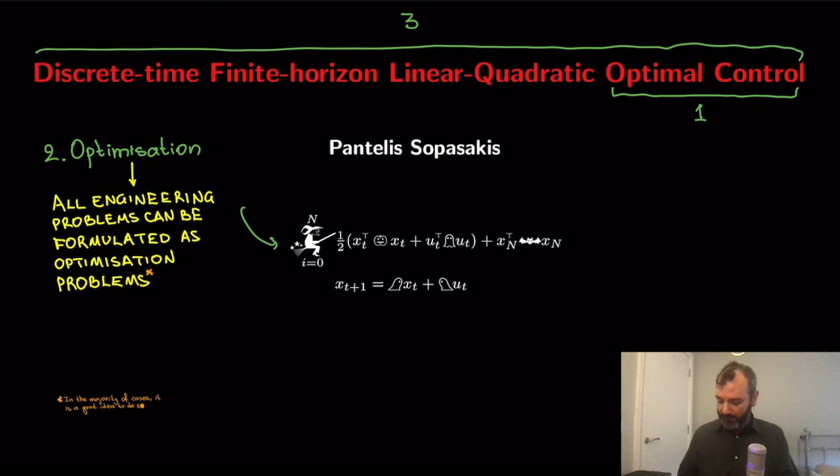I'll give a few examples related to control in the following slides. So this is how this will work today. First, I will define what optimal control is, but I will not tell you how to solve it. I will just try to motivate why we are interested in solving such problems. Then the focus will be on optimization, and then we'll come back to optimal control, and we will solve perhaps the simplest optimal control problem, which is the discrete time, finite horizon, linear-quadratic optimal control problem. Again, it's a lengthy title, but there is no short version. We will be focusing today on convex optimization.

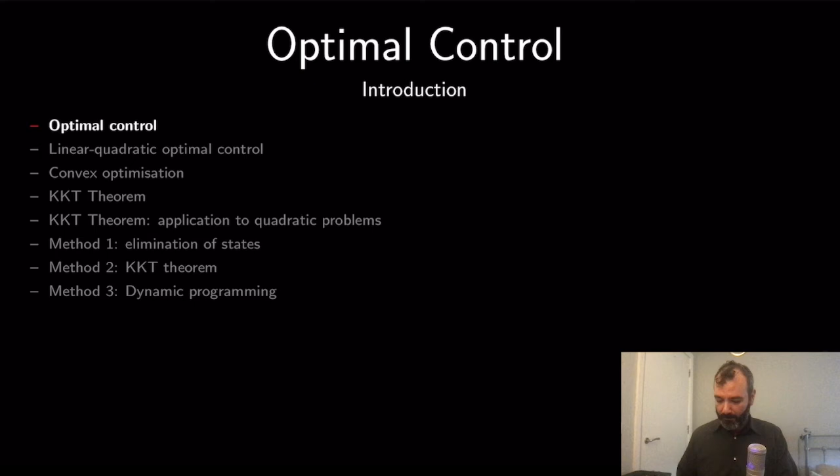Let's start with optimal control. So what is optimal control, more or less? How can we describe it? It is controlling a system, trying to steer a dynamical system to a certain target, a certain destination or set point, while we minimize a certain performance index. So we have a way to measure and characterize the performance of trajectories of the system, and we want to optimize it, to minimize it, for example.

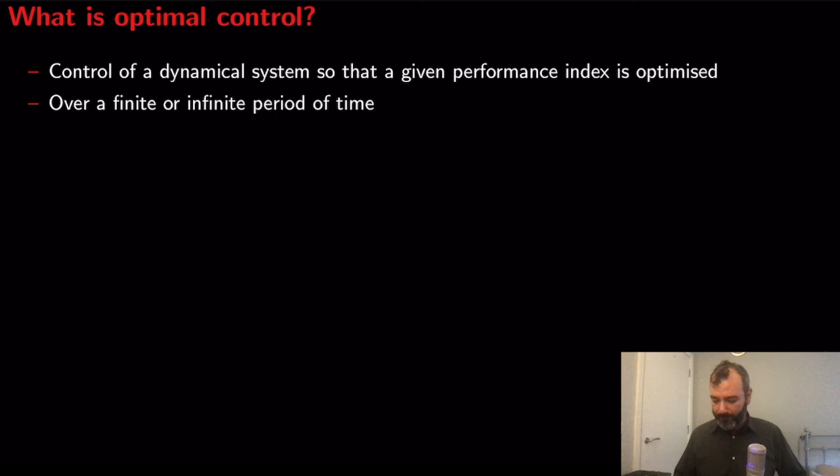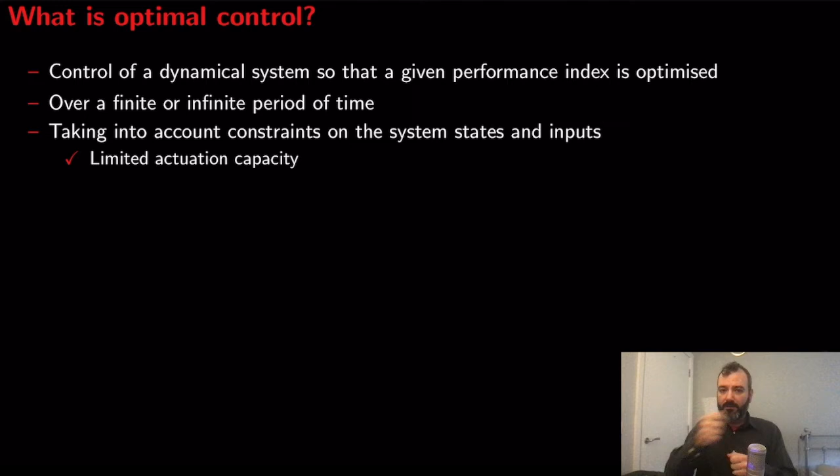And we will do so over a finite or infinite period of time, taking into account any constraints that might be acting on the system states and inputs. For example, you might have limited actuation capacity. When you drive a car, it doesn't make sense to steer the steering wheel too much—there are certain limits. If you have a pipe with water running through it, you can turn the valve to the closed position, a 0% flow, or all the way to 100%. So your actuator, the valve, can only take values between 0 and 100%.

You cannot use the valve to make the water flow at 120% of the maximum, or go negative. Or, for example, if you have a switch, it has only two possible values—it can be on or off. If on is 1 and off is 0, these are the only values that the actuator, your control action, is allowed to have. So these are examples of constraints.

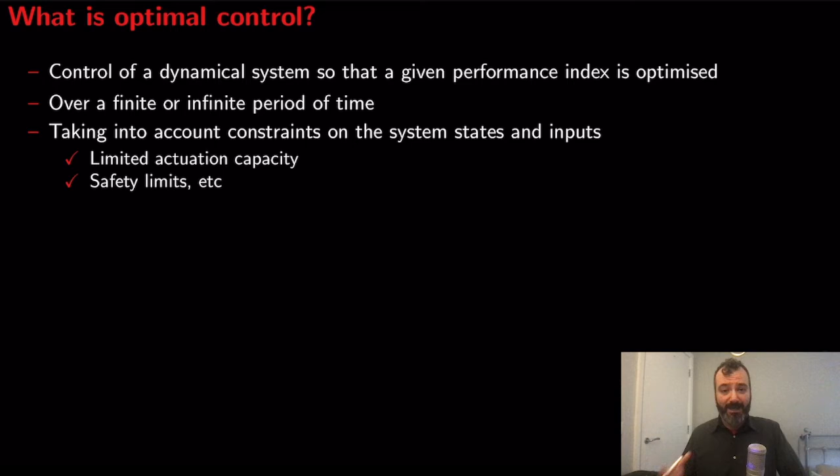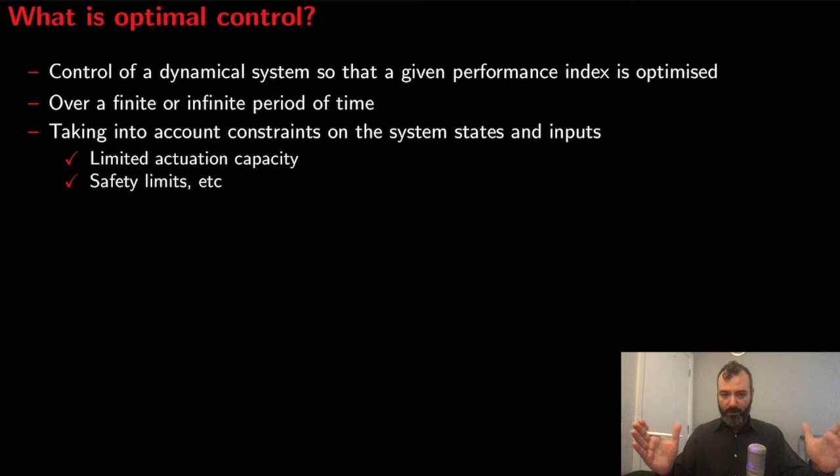You can have safety limits. If we are talking about autonomous vehicles, a safety limit is that the car drives only between the boundaries of your lane. Or if we're talking about a chemical reactor, a safety limit can be that there is a minimum and a maximum temperature.

Other considerations are the economic operation of whatever we are controlling. Back to the vehicle example, economic operation corresponds to minimization of fuel consumption, or if you're operating an electric device, minimization of power consumption, or at the same time, maximization of productivity. These objectives can be conflicting—you cannot have minimum fuel consumption and maximum productivity at the same time. You need to strike a desirable balance between these two.

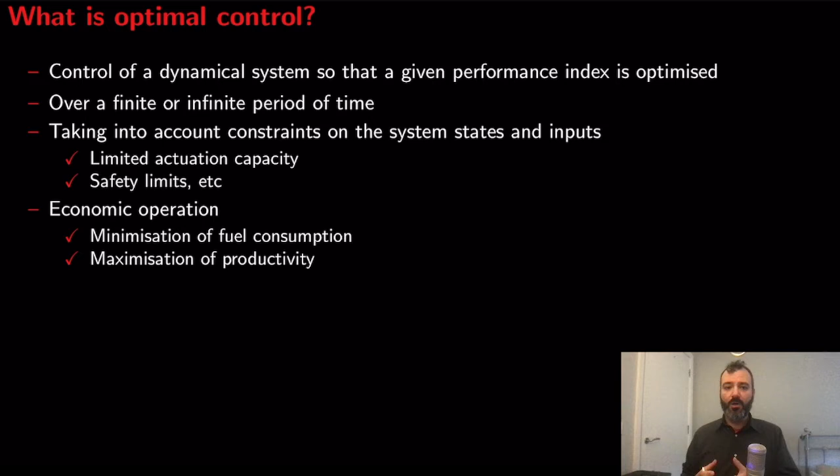So these are examples of objectives we can have in optimal control. To put it concisely, you have a dynamical system—think of a vehicle that needs to drive from an initial position to a final destination. The question is, how can you do that in finite time so that you minimize a certain performance index, while taking into account any limitations on actuation, on control actions, or safety limitations on the state variables of your system.

There are many applications of optimal control. One of the first applications was chess and checkers, studied by Richard Bellman in 1965. Also, how to reach the moon with minimum fuel consumption—these problems were studied in the 60s and 70s. And then we have inventory control, autonomous trains, car parking, and robots, which are operated primarily with optimal control.

Then you have even systems that you wouldn't really think of as engineering systems, like in macroeconomics, how to maximize the GDP of a country, or how to minimize unemployment, or do both at the same time.

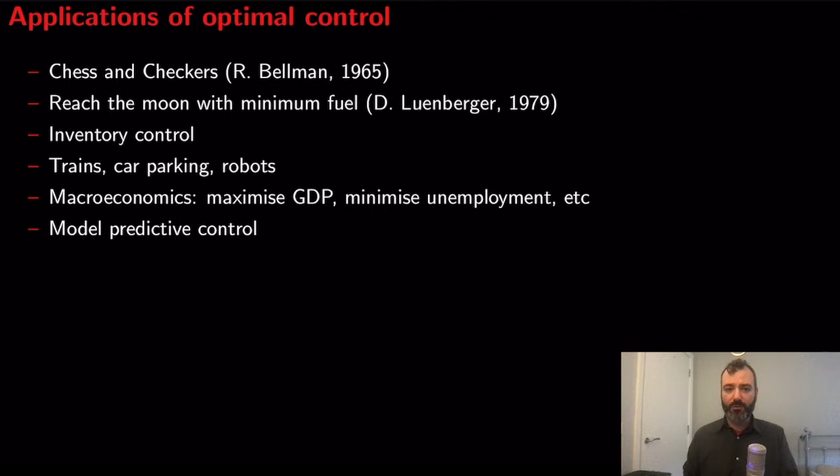And then we have model predictive control, which is the main objective of this module. So actually we are studying optimal control because later we will use it to design appropriate model predictive controllers.

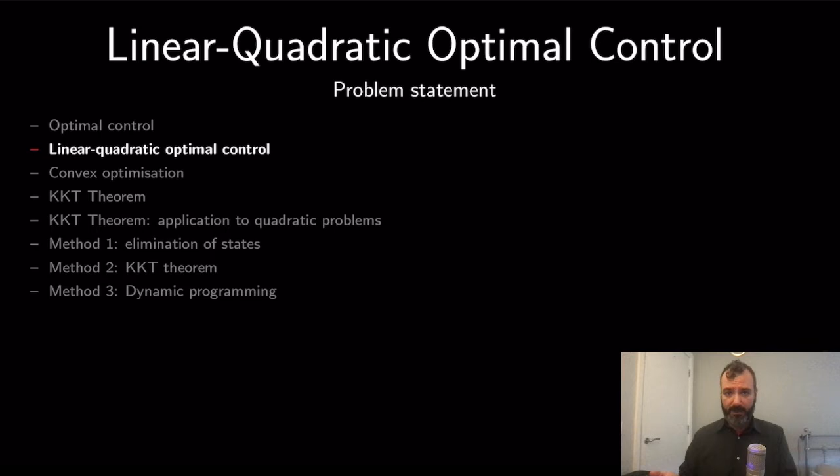Now let's try to be a little more technical when it comes to this form of optimal control. This is one of the simplest possible formulations of optimal control problems, the linear-quadratic optimal control, and it is in fact one of the very few cases that we can solve on paper. In principle, we cannot solve optimal control problems analytically on paper, we have to use software. This one is an exception, a case that we can actually solve ourselves without computers.

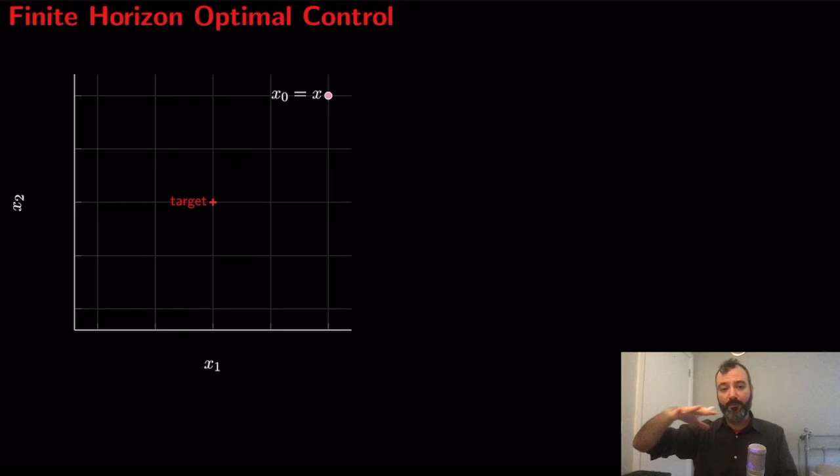So imagine you exercise a control action, and the system from here goes here. And then another control action, and from here the system goes here. You will see that x1 is a function f0 of x0, u0. This is the system dynamics, some equation that comes from physics, like Newton's laws of motion, that dictate and explain how, if you apply a certain action, a certain force, for example u0 can be a force, how the system moves from this initial position to this position at time 1, and then to this position at time 2.

So what happens is that you apply an action u0, the system goes here, then you apply an action u1, and at the next time instant the system goes here.

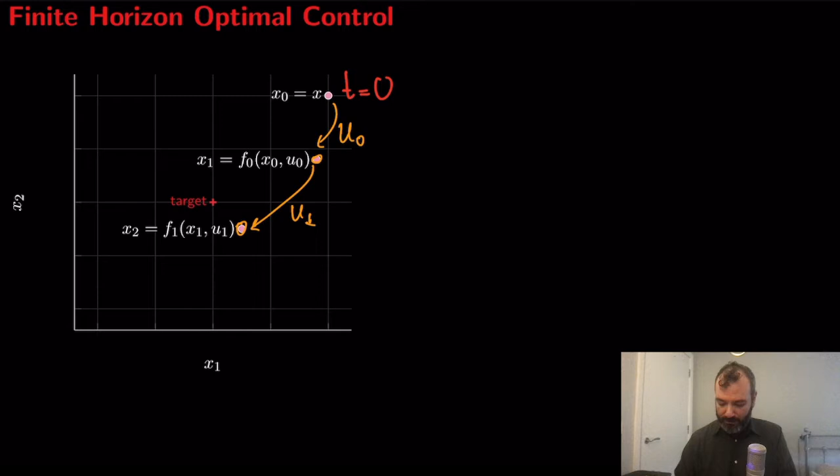I should have mentioned that here we study the system in the discrete time domain. So we have the 0th or initial time, t equals 0, then we have t equals 1, t equals 2. So t is an index, it is not a continuous time variable.

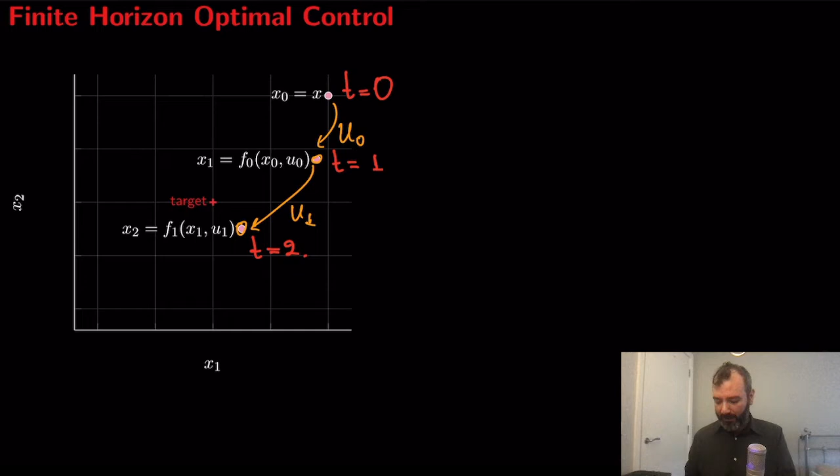So now imagine that the system starts from here, you apply the control action u0, the system goes to x1, then you apply the control action u1, the system goes to x2, you apply the control action u2, the system goes to x3. And needless to say, had you applied a different sequence of actions, like a different u0, the system would go here, then perhaps here, and so on. So by applying different sequences of control actions, you can make the system move in different ways.

Now, the system is at an initial position x0, and you apply a control action u0. To apply this control action, you have to pay a cost. Imagine if you're driving a vehicle, this cost can be nothing else but the cost of fuel. So if you step down on the accelerator pedal, this cost will be high. If you take it slower and smoother, this will be a lower cost.

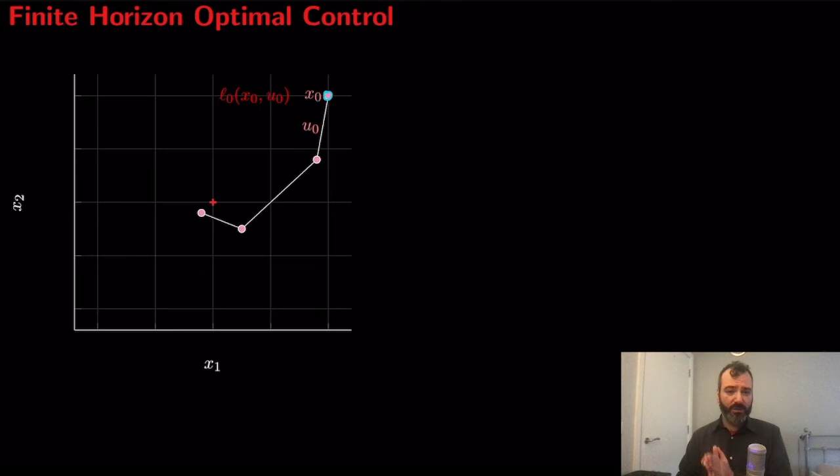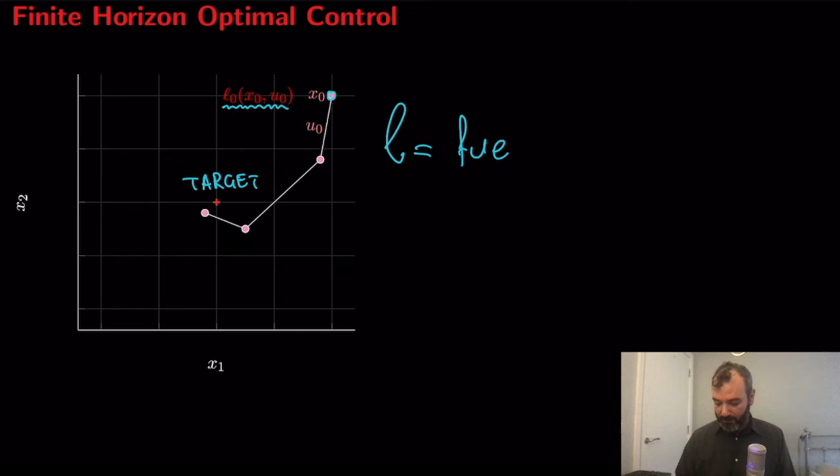So there can be a cost associated with fuel consumption, but the cost here, this cost function L of x0, u0, should not only reflect how much you pay to control the system, to operate the system, it should also reflect your control objectives. And here the control objective is to reach this target. So it makes sense to choose L to be equal to something like the fuel consumption plus some additional cost that has to do with the satisfaction of the objective, which is to reach the target.

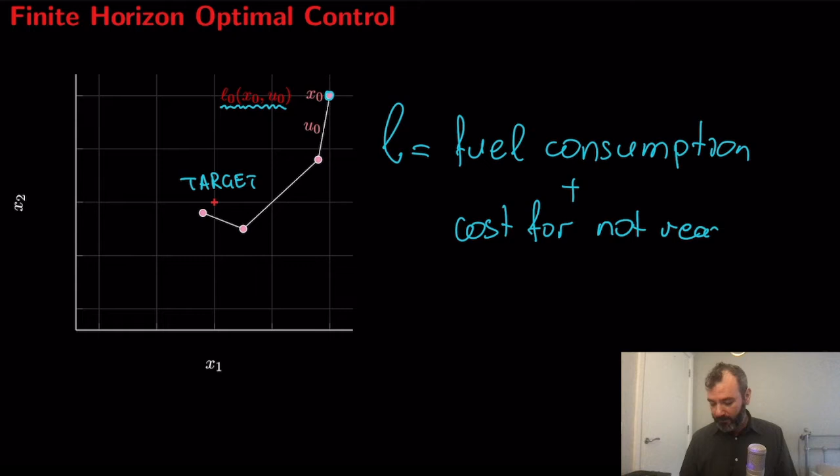So a cost for not reaching the target, which, if you think about it, that's a synonym for the distance to the target.

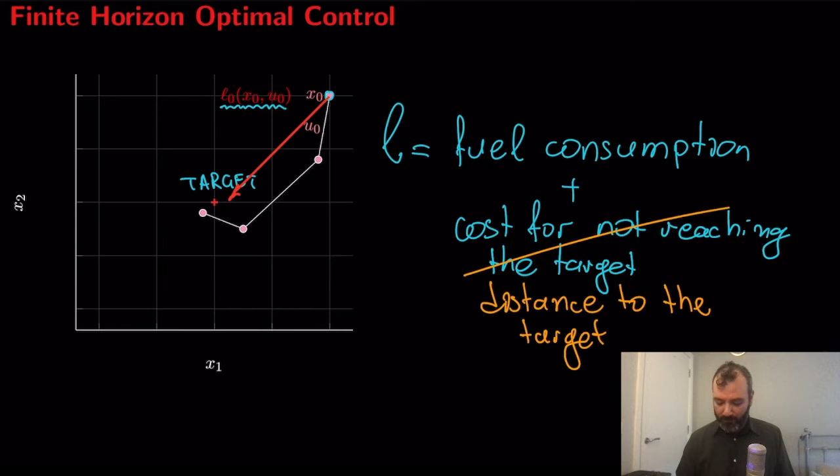So here's how it goes. You start at this x0, you start at this position x0, and you have to make a choice there. Either you will consume lots of fuel, but you will go very close to your destination. So this red line here, this red arrow, corresponds to lots of fuel, but you go closer to your target.

So this is one possibility. Another possibility is to do something like this, the eco-friendly operation. So you don't go that close to the target, you move slower, and after one time instant you're not that close to the target, but you have consumed less fuel.

So here is the dilemma that the controller has to address. Either it will go very fast, it will consume lots of fuel, but it will reach the target fast, or it will take it easier. But this anyway is reflected by this cost function. And you can say that fuel consumption for me is really important, so you can do 1000 times the fuel consumption plus the distance to the target. Or you can say, I don't care about the environment.

I will weight the distance to the target by 1000, and I will penalize the fuel consumption again, but that's not so important to me. So this is where the designer needs to decide how the system will be operated, how aggressive or how smooth it will be.

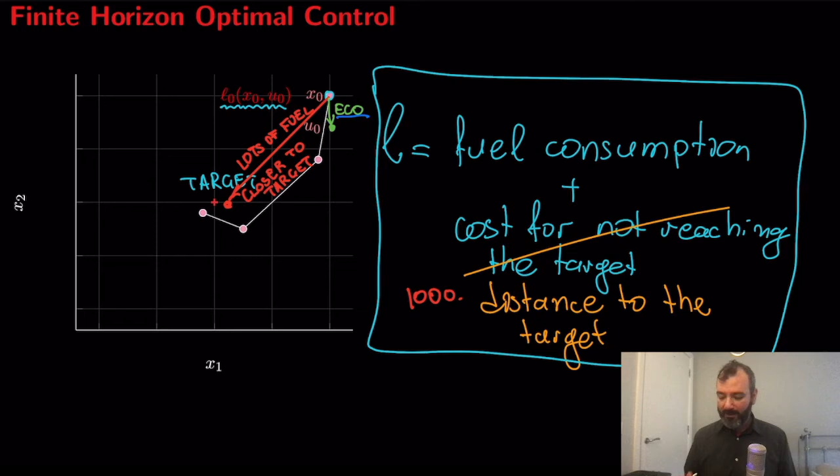But the thing is, we start the statement of the control problem by defining this function L, a function of the state and the input, called a cost function. In fact, we call it the stage cost. Let me move on to the next slide.

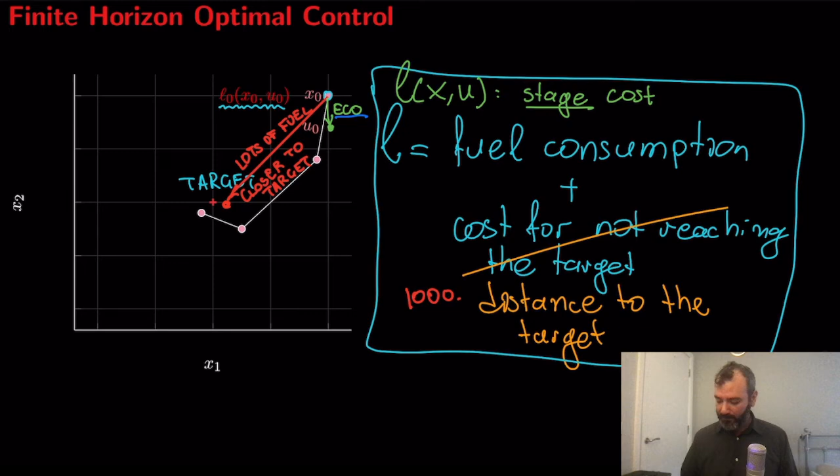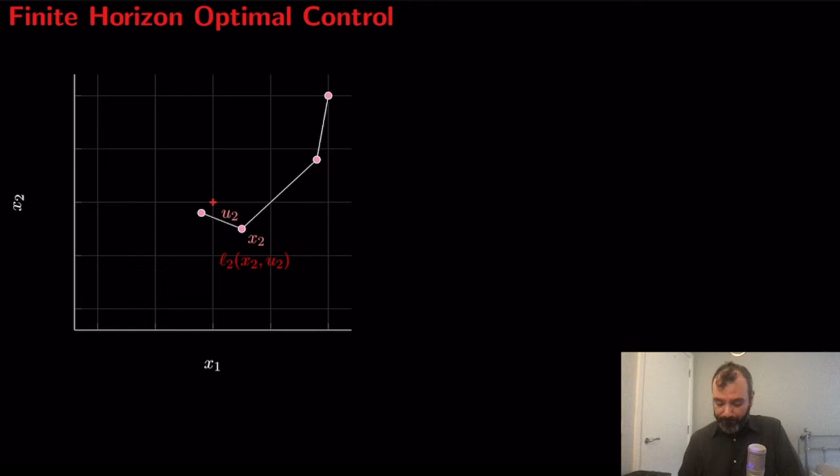So at every time you have a different cost that you have to pay. We said that at the beginning you are at x0, you take a decision u0, and you have to pay L of x0, u0. Then at time 1 you are at x1, you make a decision u1, and you pay a cost L of x1, u1. At time 2 you are at this point, you make a decision u2, and the cost is L2 of x2, u2.

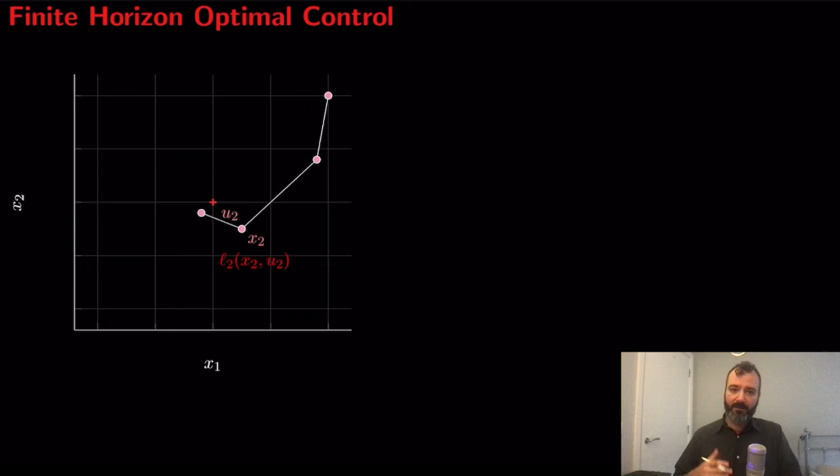So at every time instant, based on where you are and what you will do at that point, you have to pay a corresponding cost, which reflects the fuel consumption or actuation intensity, and on the other hand, the attainment of the target, how close you are to the final destination.

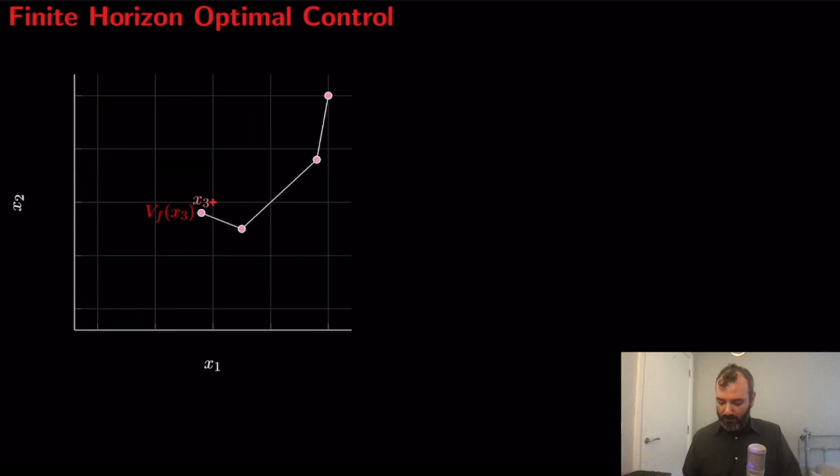At the end, you have to stop at a point, because this is what we call a finite horizon problem. You say, I'm studying this system for 10 steps only, as opposed to an infinite horizon problem, which we will talk about briefly much later.

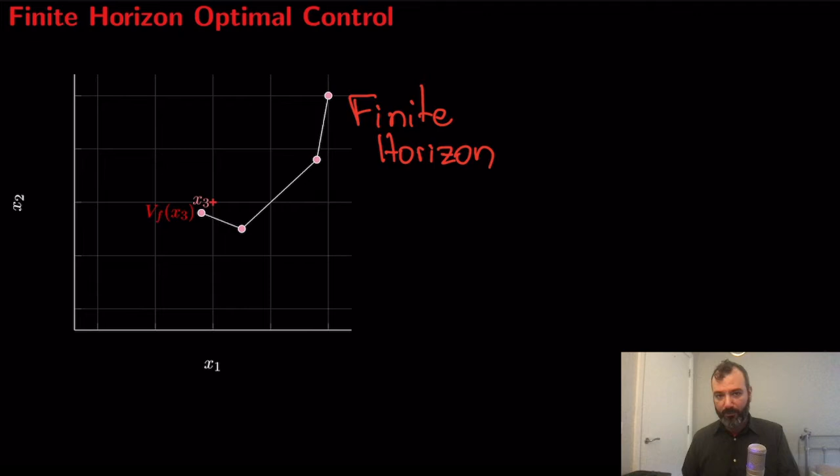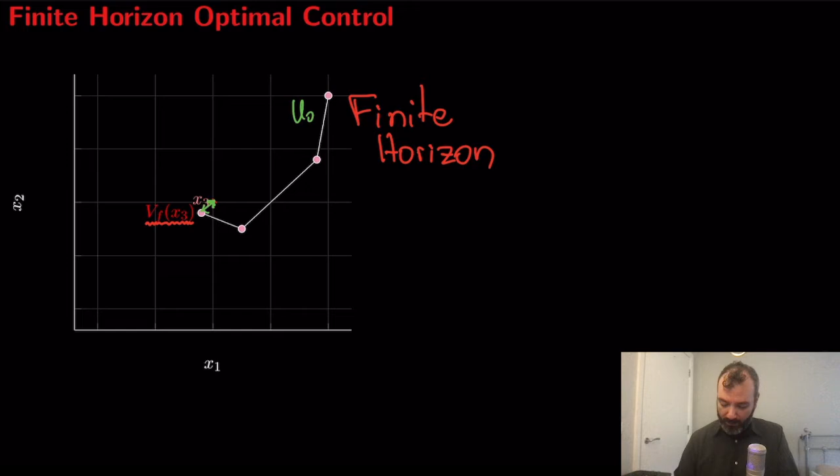At the final time, x3, at time 3, you have to pay a final penalty, a final cost, that penalizes only how far I am from the destination. There's no other decision for you to make. Time is up, you can't make any more decisions, but you have to judge this whole sequence of decisions you already made, like u0, u1, u2. So you have to evaluate at the end how close to the target you found yourself.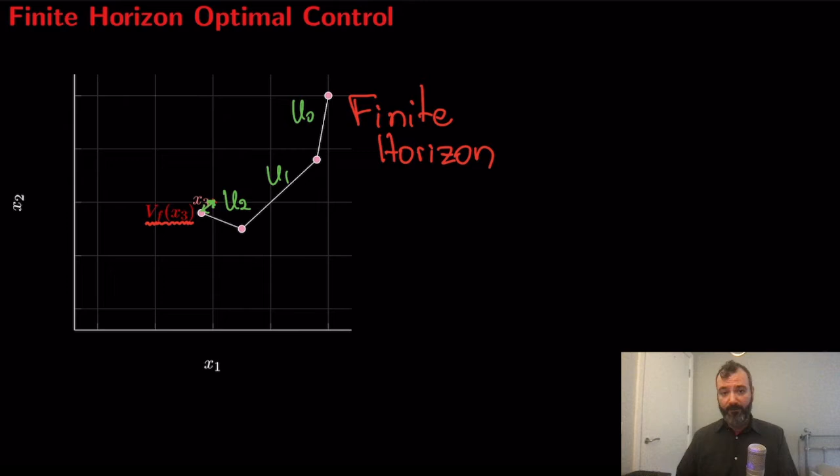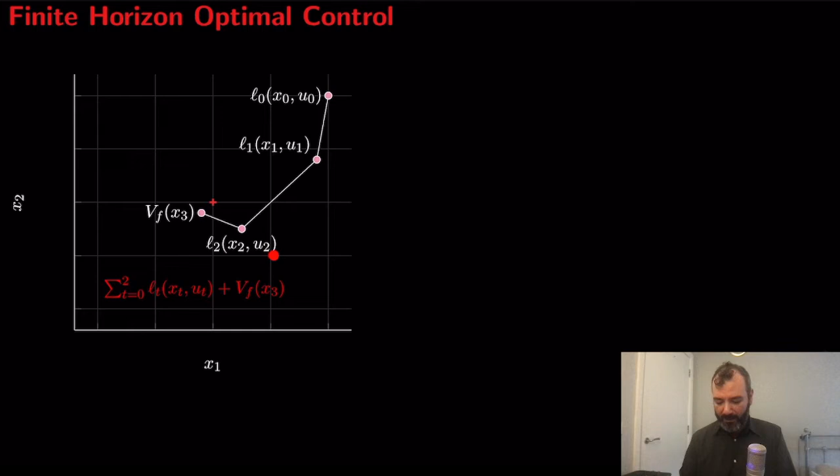If you put everything together now, the initial cost at time 0, the cost at time 1, the cost at time 2, and the terminal cost — this is called the terminal cost function — then you have what is called the total cost function. The total cost function is the summation of all costs: this cost plus this cost plus this one plus the terminal one. It is the summation from time 0 to time 2 of the stage costs plus the terminal cost, VF. And this is what you have to pay.

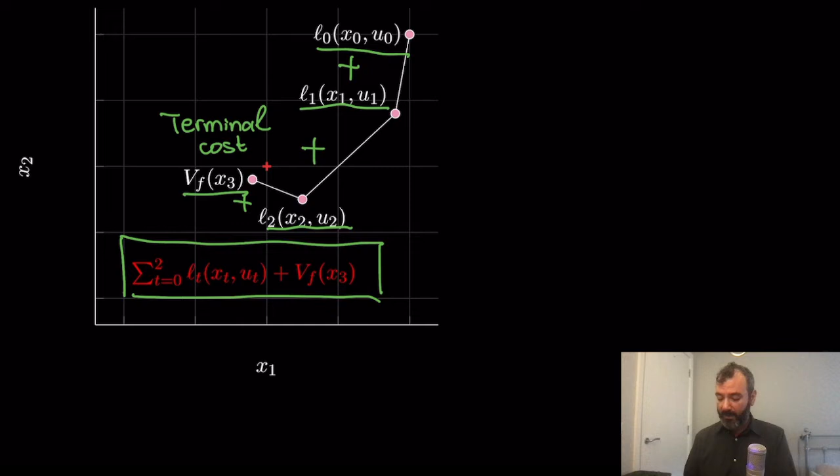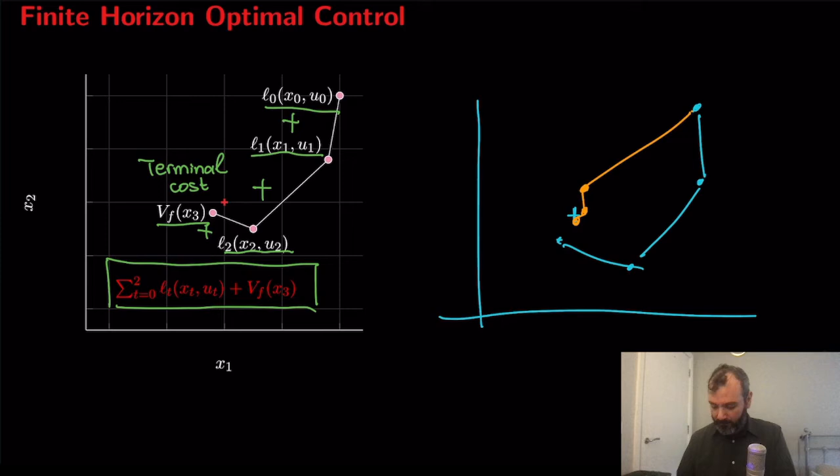Now let me make a copy of this sketch on the right. Let's say you apply a different sequence of control actions. This is the original one. You decide to take entirely different control actions, trying to be more aggressive. You try to go here, and then here, and then here. So it looks like you made a big stride with u0, then u1, then u2.

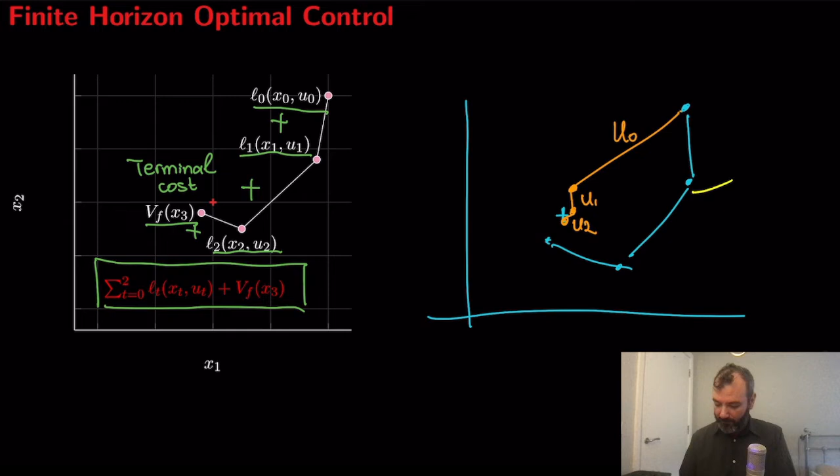This entails a certain cost. Let's write this down in pounds: say this trajectory requires you to pay 10 pounds, and this other trajectory requires you to pay 20 pounds. So which one is better? The first one, the cyan one, is better because it leads to a lower cost.

So what is key here is how you define this cost function. Different cost functions lead to different best behaviors. What you define as best is somewhat subjective.

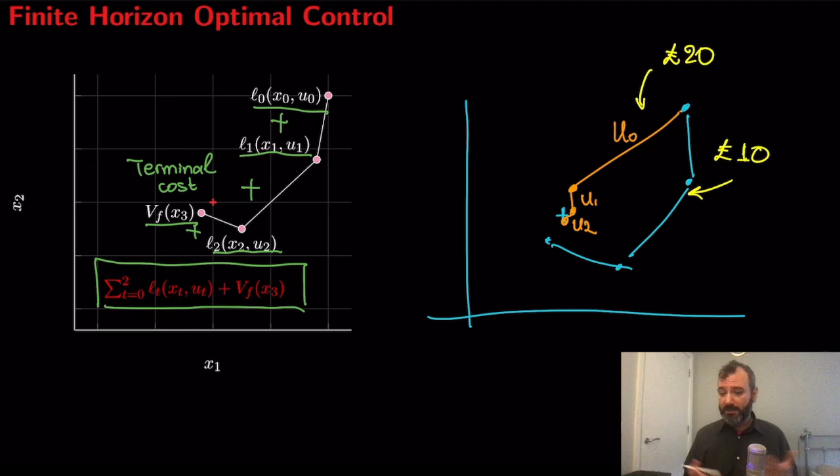Let's summarize the ingredients of what we just described. The ingredients of a finite horizon, discrete time finite horizon optimal control problem are the following. First of all, you need a system — you need to know what you're talking about. Is it a car? Is it a plane? Is it a nuclear reactor? What is it? So the first thing is a dynamical model of the system.

What is it governed by? Is it Newton's equations of motion? Is it Kirchhoff's laws of a circuit? Is it heat exchange, a heating system? What is it exactly? The equations we use to describe dynamical systems have this form: the state of my system, denoted by x, at the next time instant, time t plus 1, is some function f, depending on the problem, of my state at the current time and the control action at the current time.

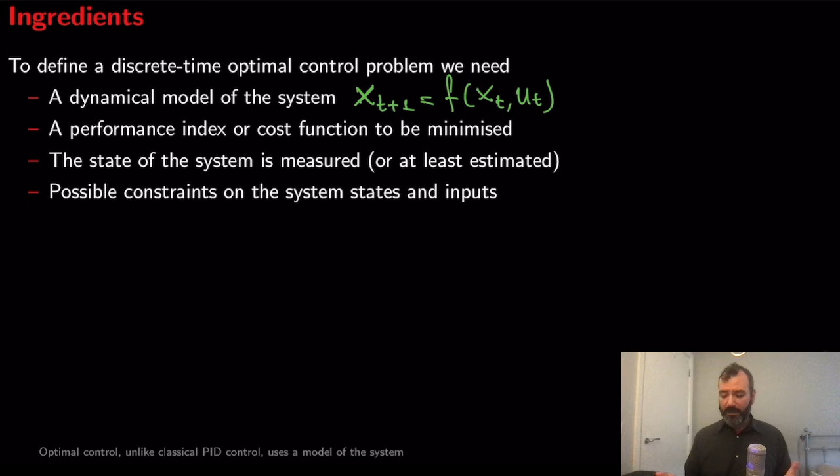The second thing you need is a performance indicator, a cost function to be minimized. What is this cost function we use in discrete time finite horizon optimal control? It is a summation of functions called ℓ_t(x_t, u_t) plus VF of x at the terminal, the final time. Let's call it xn, n being the final time, or the prediction horizon. N is the prediction horizon.

The third thing you need is to be able to measure the state of the system, to measure the initial state, to know where you actually are. So we say we start from here, we assume we know that. It is a very simple assumption, but we still have to state it. It means you have a sensor, a way to measure, to see that your car is here, that this is the temperature at the current time of your room. If you have an air conditioning system, you need to be able to measure the state. If you're not able to measure the state, that's probably fine, often, so long as you can somehow estimate it.

And the last thing you need is any constraints, any safety considerations, or any other types of constraints that we have. Now, unlike PID, because it is very natural to ask, we know about PID control. PID is very famous and very widely used in the industry and in many applications. What is the difference between PID and this optimal control?

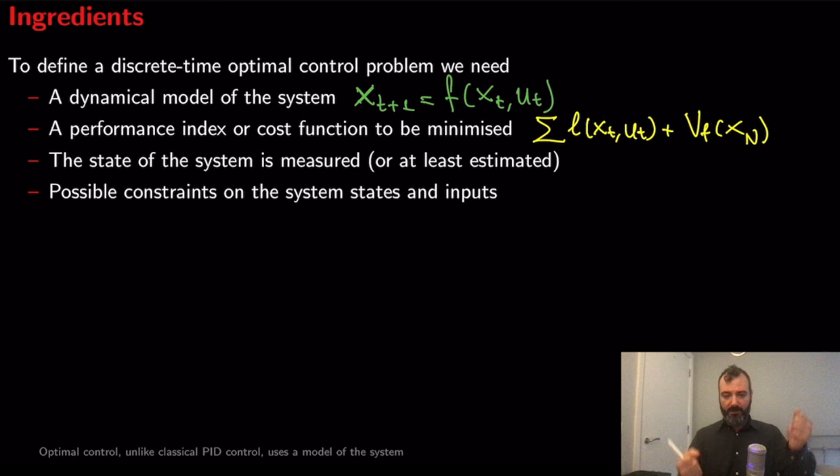The third thing, which is also very important, is that with a PID controller, you can only control a system that has one output and one input. You can control one thing using one thing. In the example of the vehicle, you have several control actions. You have the steering wheel, the steering angle, the acceleration reference from the pedal, and the brakes as well. So you have lots of control actions involved in this example, and you have lots of states. You have the X position, the Y position, and the orientation or heading of the vehicle. So you have three things you need to control. The PID doesn't seem to be a good idea in this example.

So this is why this is a motivation for looking into optimal control. And in many engineering applications, optimal control is exactly what you need.

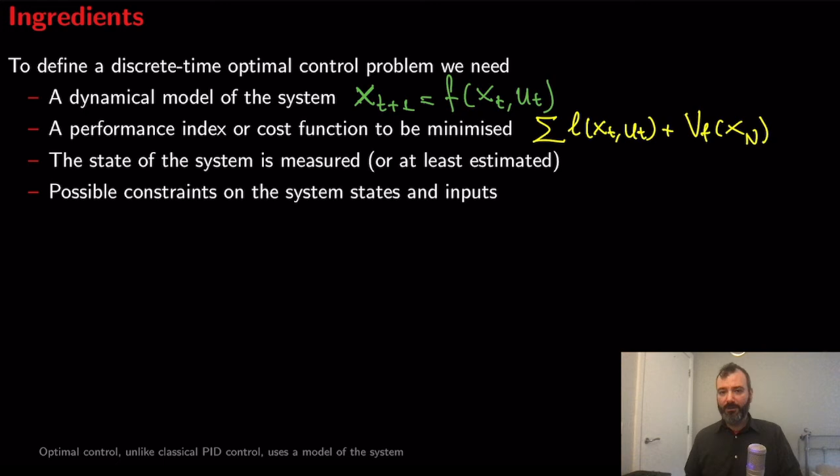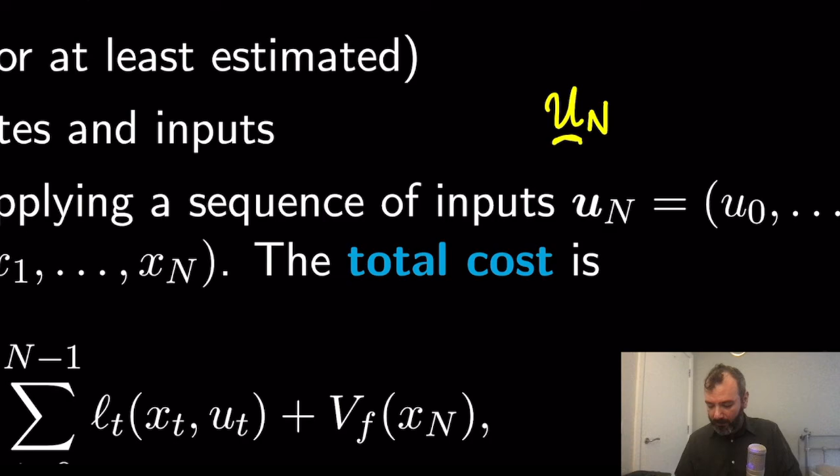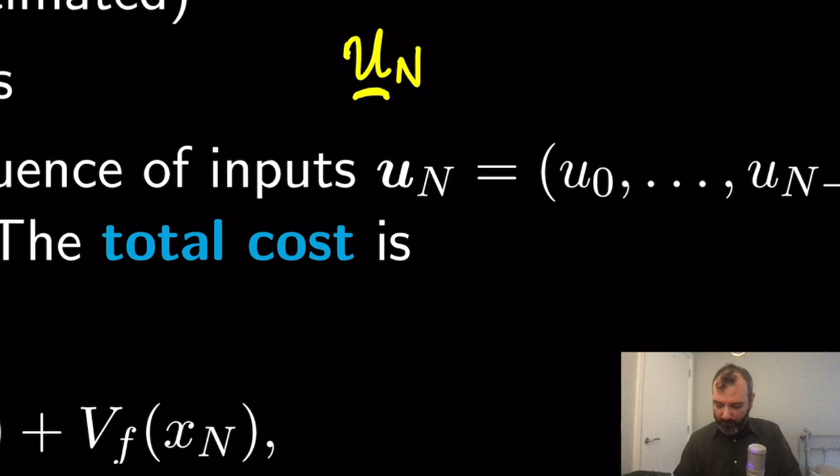Now let's move on with the formulation of the problem. It goes like this: starting from an initial state x0, I know where I'm starting from, and applying a sequence of inputs u, please pay attention here. This is u boldface. When we write it on paper, we will be writing it like this, because it's impossible to do a boldface u on paper. We do un and underline it. So when you see u boldface subscript n, when we write it ourselves on paper, we will be using the notation un underlined.

Back to our discussion about optimal control now. So starting from an initial state x0 and applying a sequence of inputs u boldface n, we obtain a sequence of states, right? And we can measure how well we did by that choice of a sequence of inputs by measuring the total cost we have to pay, the total cost associated with this choice of control actions that leads to this sequence of states. So we measure how good this is, how costly this is. This L is the stage cost function, and this VF is the terminal cost function.

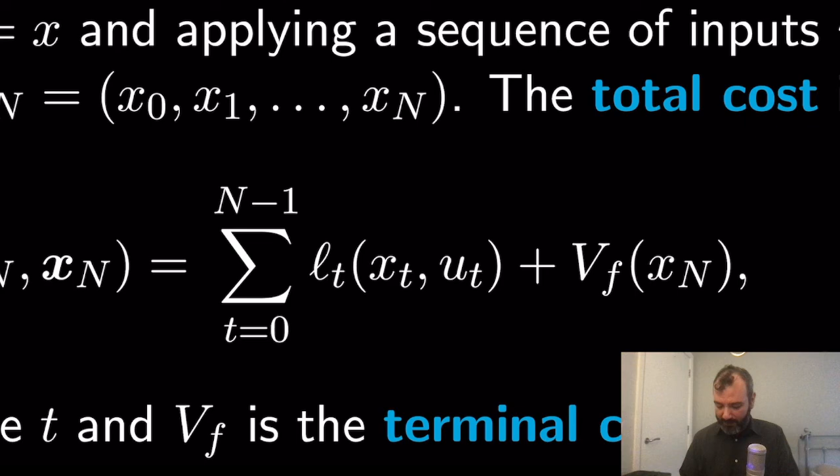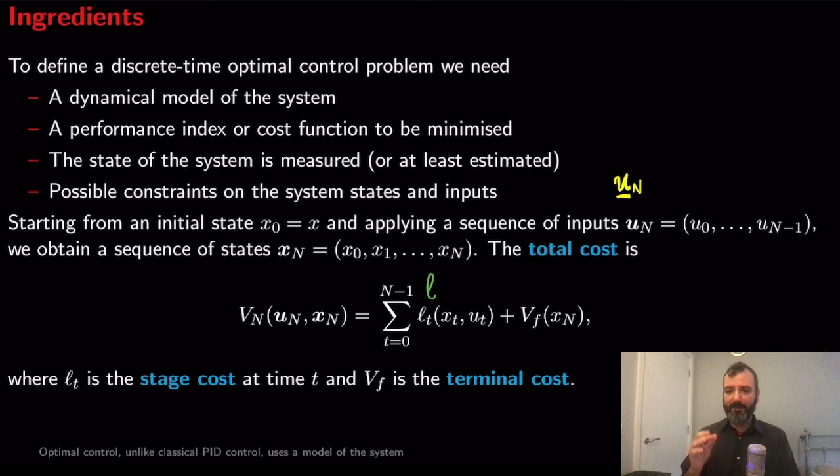You must have observed here that it is L underscore t. This simply means that I can be measuring my cost in a different way at different times, but in principle this can be just L. Often it is just L instead of L that changes with time. One special case of optimal control, what I just showed you was the most general case, but now one special case that we focus on a lot is the case where the system is linear.

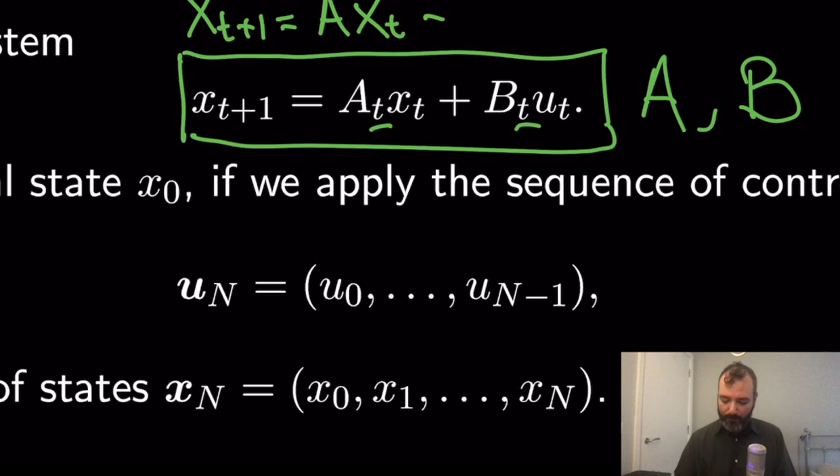It is xt plus 1, it is not some fancy function f, but it is just A times x plus B times u. A given constant matrix A times the state plus B times the input. So all you need to know about the system dynamics is a pair of matrices A and B. In this equation I have A that depends on time and B that depends on time.

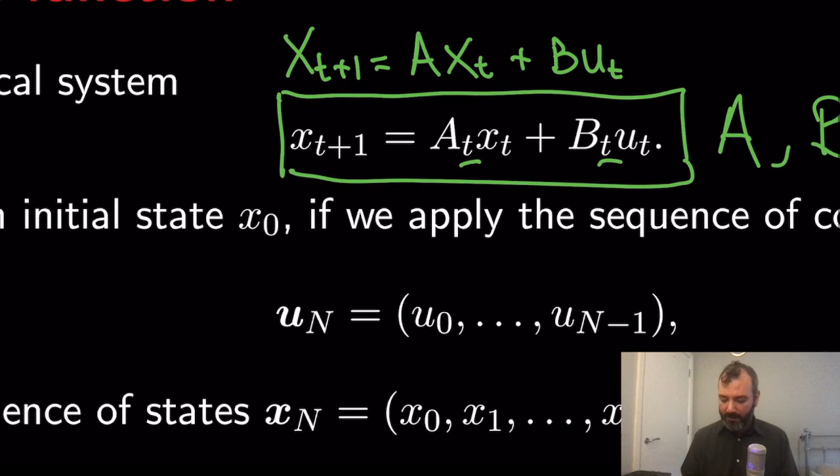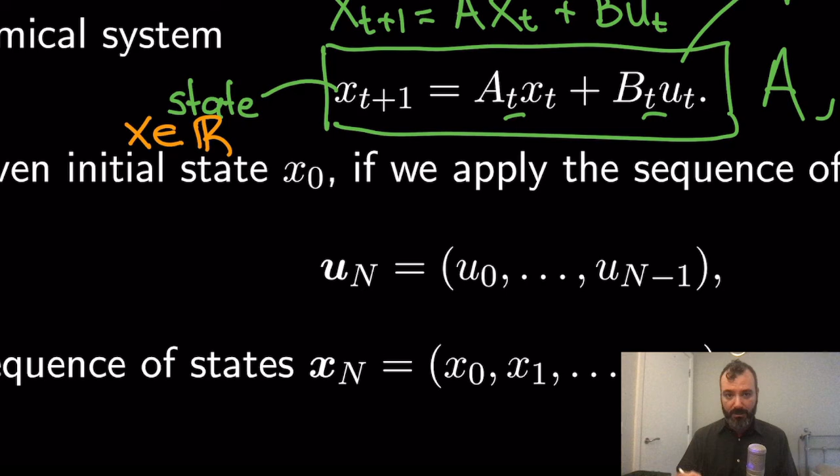But a simpler case is to say xt plus 1 is equal to A xt plus B ut. The system is perfectly and fully characterized by two matrices, A and B. Once again, x is the state of the system, and u is the input. Nothing prevents the state and the input from being vectors. They don't need to be just numbers, scalars. They can be vectors. This can be a vector of Rn.

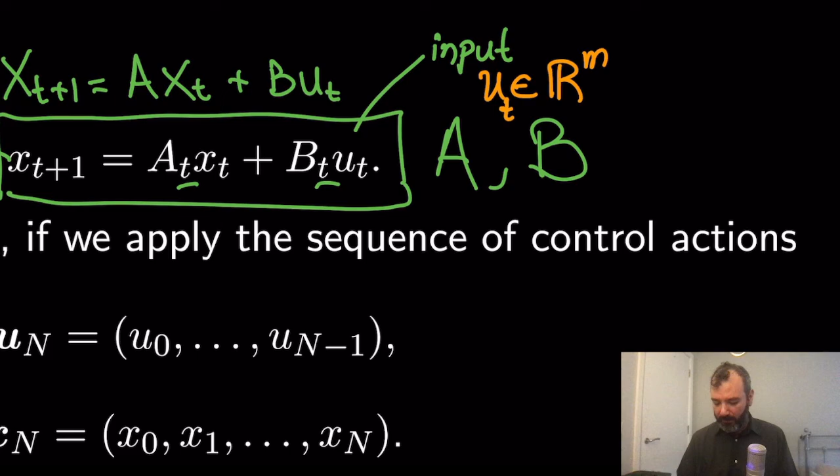This can be a vector of, say, Rm. Ut depends on time, xt depends on time. So starting from an initial given state x0 that I can measure, if we apply the sequence of control actions u boldface n, a sequence u0, u1, u2 up to un minus 1, we will obtain a sequence of states x0, x1 up to xn.

And we define the total cost function exactly the same way as before. But now I am using a particular form for my function L of x comma u, which is 1/2 times x transpose Q x plus u transpose R u. This is an interesting choice of function. You might be already familiar with the expression x transpose Q x and u transpose R u. These are quadratic forms.

Which we studied in the introductory lectures on linear algebra. Now I will delete x transpose Q x and I will simply write norm of x squared with the matrix Q, because the norm will allow me to understand better what this term is and what it does, plus u squared norm with matrix R.

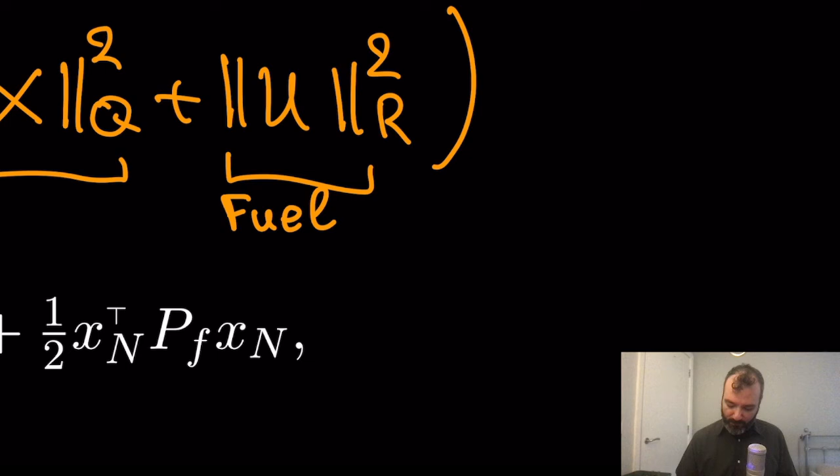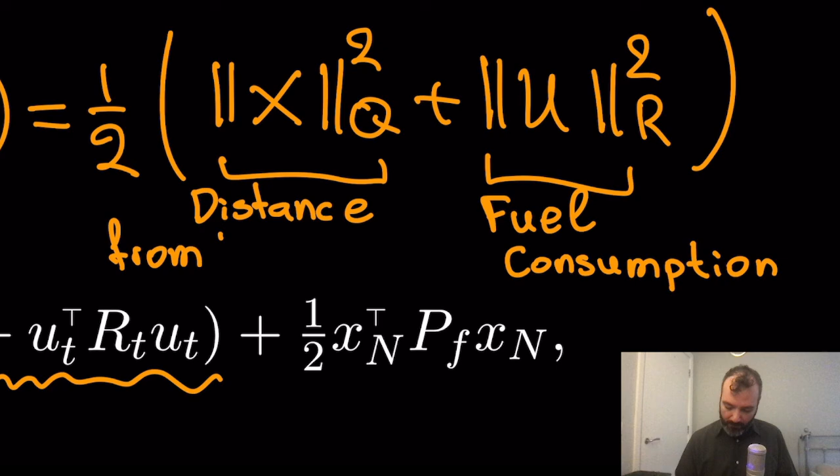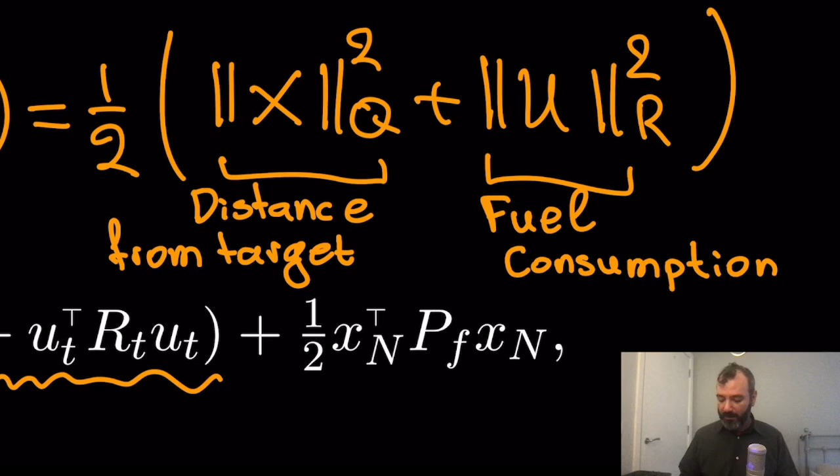So we can relate this term with fuel consumption, you can think of it like this, fuel consumption. And this term, the first term, has to do with the distance from the target. The first term is the distance from the target, if the target is 0, and the second term is my fuel consumption. The higher the norm of u, the more fuel, so to speak, we need to consume, the more effort we need to put to control the system. The fuel consumption, or if you prefer, the control effort.

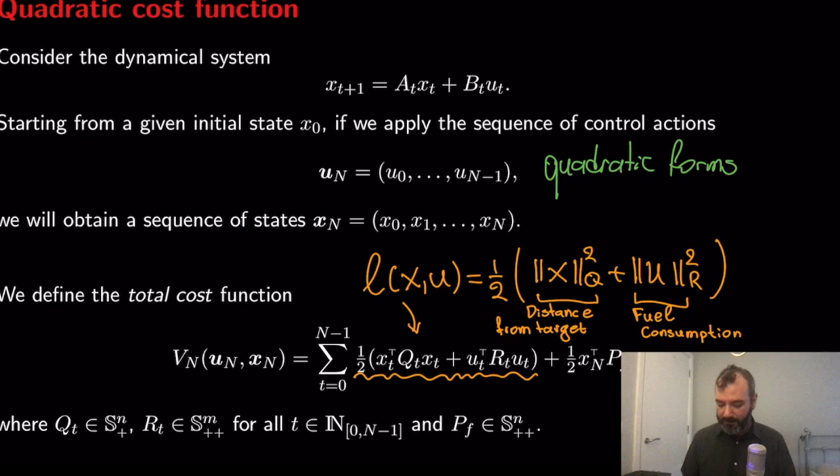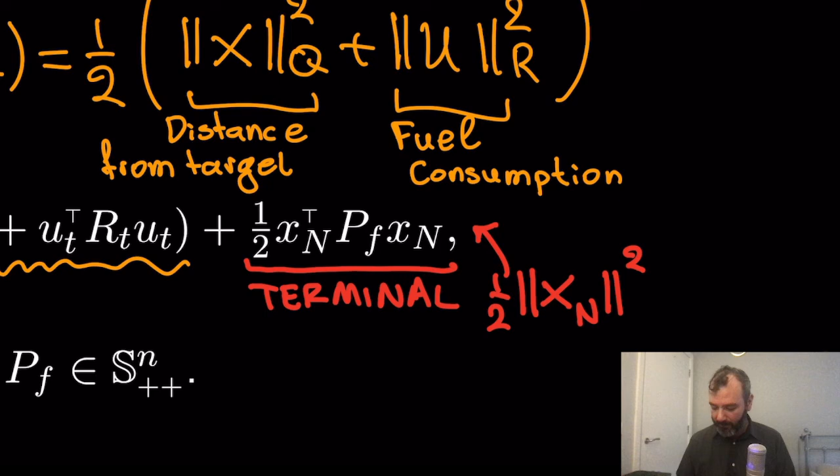So let's go back to the cost function. The cost function is a summation of the stage cost function plus a terminal cost function. This is the terminal cost that measures how far away my terminal state, my state at time n, is from 0, if 0 is the target. So this quantity here is the same as 1/2 norm of the terminal state squared, but with a different matrix, PF, F as in final.

And if we look at the whole thing, the total cost function is a sum of stage cost functions plus the terminal cost function. Now you must be wondering, what are these matrices Q, R, and PF? These matrices are in principle positive semi-definite matrices. Q is positive semi-definite, R is positive definite, and PF is positive definite as well.

And they have different dimensions, so Q is n by n because it penalizes the state, which is of dimension n. PF is of dimension n by n, which again penalizes the state. And this matrix R is m by m, same dimension as the input, because this is applied to penalize the input.

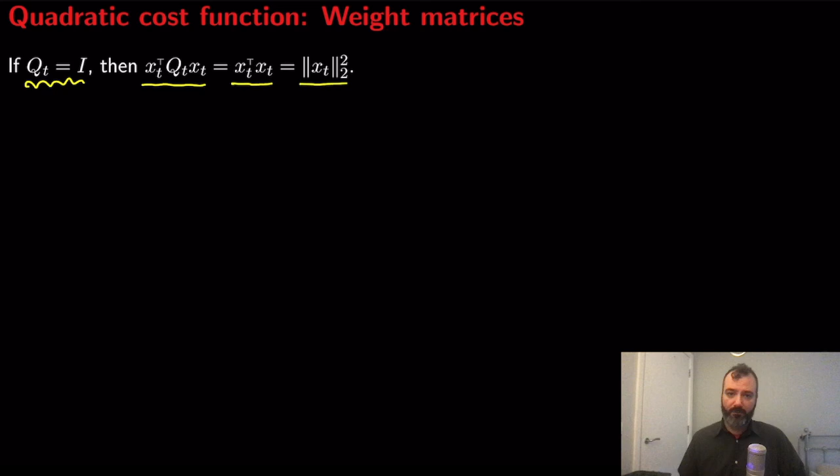Let's try to make sense of what these matrices might look like, some particular examples. So the easiest choice for matrix Q, for instance, is to take it to be the identity. What happens if you take it to be the identity? Then the quadratic form x transpose Q x becomes simply x transpose x, which is nothing but the Euclidean norm of x.

Let's see now what happens if you use a simple matrix. And a very simple form of a matrix is a diagonal matrix. So you can put some numbers here, and all the other entries are 0. So what happens then is that x transpose Q x looks like this: q11...

times x1 squared. This is the first entry of the vector x. q22 times x2 squared. This is the second element of the vector xt, and so on and so forth. qnn, this is the last entry, times xtn squared, the last entry of the vector x. The vector x is like this: xt, x at time t, is a vector that has coordinates 1, 2, down to n.

As we said, the state of the system can be a vector. You can have a system with states like the position of a vehicle, the velocity, and the heading, and these are different entries in a vector. You might want to penalize them with different weights, to give different importance to different variables. So you might say I don't care about the velocity, let's say this is the velocity, this is the position. If it's high, I don't care, let it be high, so I will put a small penalty on the velocity.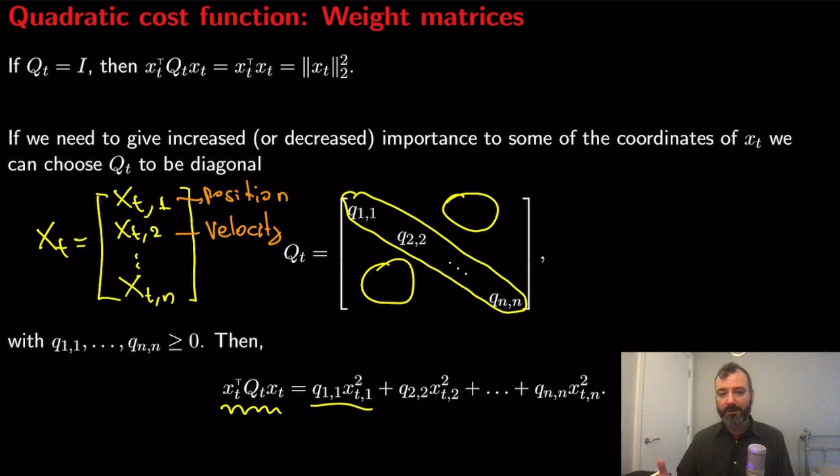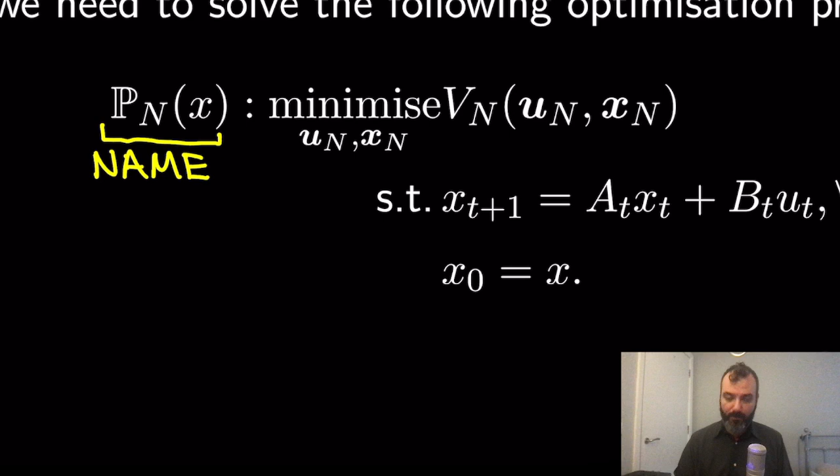If you put everything together, you end up with an optimization problem. The optimization problem looks like this. It says, given the initial state, we need to solve the following optimization problem. First of all, not to have any misunderstanding, what you see here is simply the name of the problem. We call it Pn so we don't have to say 'the above optimization problem.' So now we give it a name so we can refer to it. This is not an equation or anything, this part is just how you call the problem.

We call it Pn, and we are trying to minimize the total cost function. We are trying to minimize it and determine the sequence of control actions and the corresponding sequence of states. This is what we are looking for, subject to - meaning taking into account - the system dynamics, and of course the fact that we know where the initial state is. So we say that the initial state x at time 0 is equal to a given position x.

That's it, really. So this is what we are trying to solve, and the most important observation here is that this is an optimization problem. So we will dedicate the remaining part of this lecture to defining a little more properly what an optimization problem is, and how we can solve optimization problems.

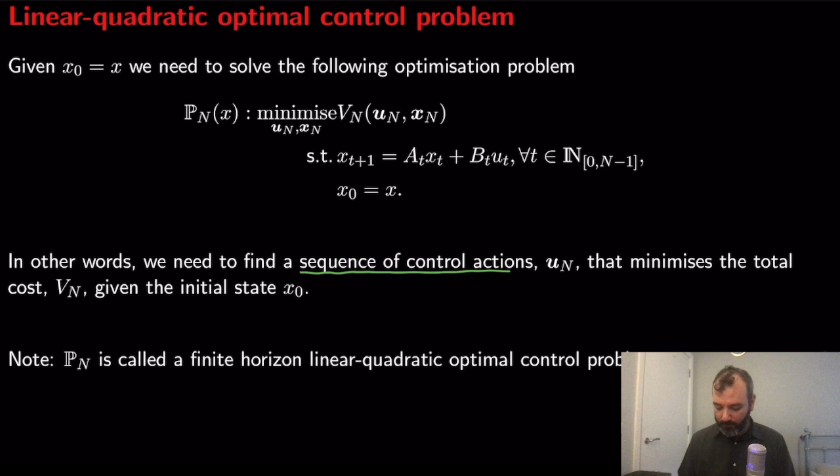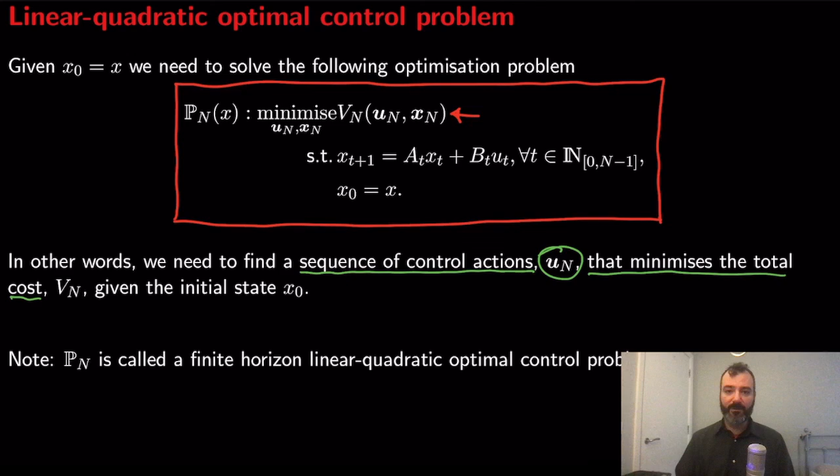Once you solve this problem, say you have solved it somehow, either by yourselves on paper or using software, we determine a sequence of control actions, denoted by U boldface subscript n. This sequence that we determine minimizes the total cost function Vn given the initial state x naught. This problem is the famous discrete time, finite horizon, linear-quadratic, optimal control problem, provided that this function Vn is the function I showed you previously - this function, which is a quadratic function.

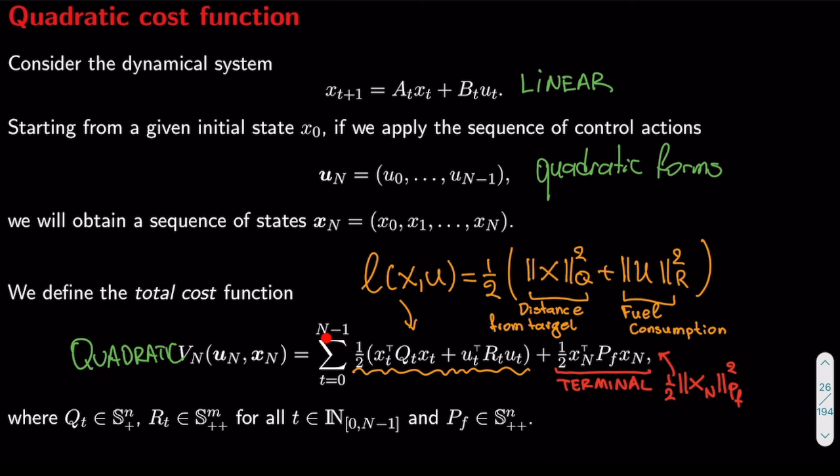And this equation is linear in x and u, so this is linear - and this is why we say we have a linear, quadratic, optimal control problem. We say it is finite horizon because this is a finite number, it doesn't go from 0 to infinity. Finite horizon, linear, quadratic, optimal control problem - this is the optimal control problem.

The questions we ask here are: what is a solution really? What is the definition of a solution, of a minimizer? What is the meaning of the word minimizer? It's not a difficult question, but still it's a question we need to ask. Does a minimizer exist? Is there a solution of this problem? If it exists, is it unique, or can I find another one perhaps? And how can we compute such a minimizer? These are questions that will be answered after we have a look at optimization.